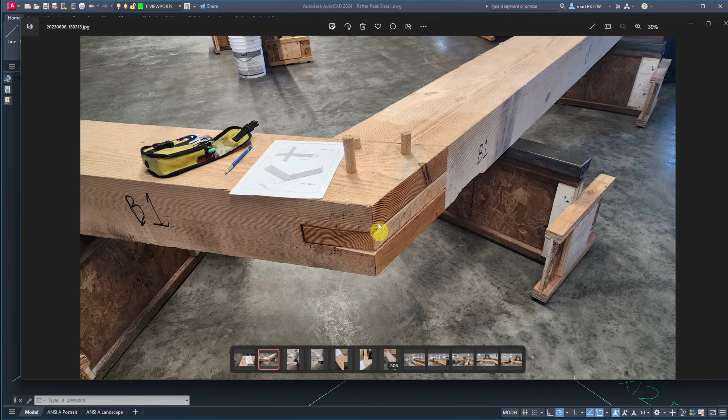So if I match properties there. And then these are in there, but I didn't get exact measurements on their locations. So what I really need to do is take a look at my picture. I'll slide it off to the side. But you can see I've got 2 down low.

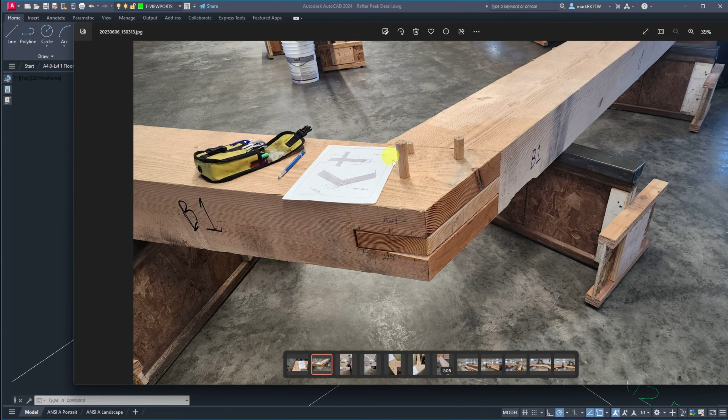He gave me some dimensions: this one is 2 inches in, this one was 1 inch in, and this one I'm going to just align it straight through this portion and put it in that location.

So to do that first one, I can grab this guy, and let's go ahead and locate it from there to here. And then I can move this guy from there to the mid. From there, I want to grab the mid.

Now I don't trust that, because I don't know if it grabbed the midpoint of itself. So just to be safe, let's type mid and drop it on the mid. Now I know it's there. So that one's in good shape.

Or actually, I'm going to leave it in case I need the line type, and I can match properties. So one of them was offset 1, and then it was offset 2, so I'll just offset it twice.

And then I've got to take a look at what we've got, and we're in by probably 2 inches from this guy. So offset 2, and that gives me an intersection here. So I'm going to copy that from there to that intersection.

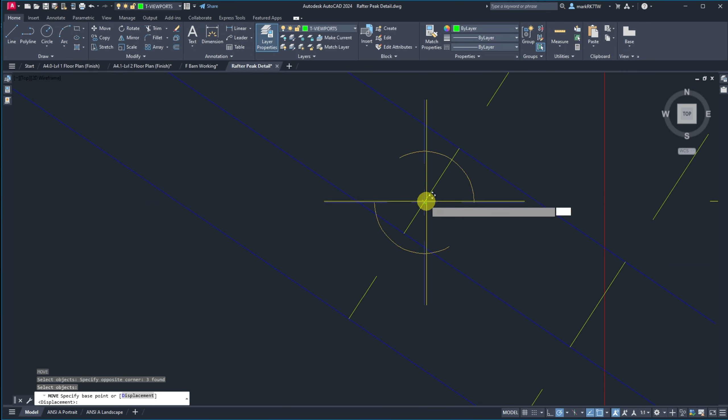Oops, I missed. So now I've got to move it there, there, to there. And then I can get rid of this. And I can get rid of this. So I've got one more.

And that one is about 3 inches in from here. So I'm going to copy that from that point to that intersection. And I've got all of my pieces in here, and I don't need that.

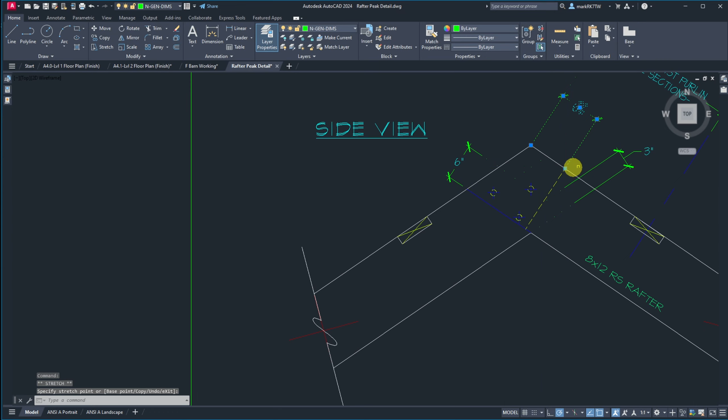So what I want to do now is dimension this out and make it make sense. And these look like they're angled. So I think if I put this here, it should give me a good angular dimension.

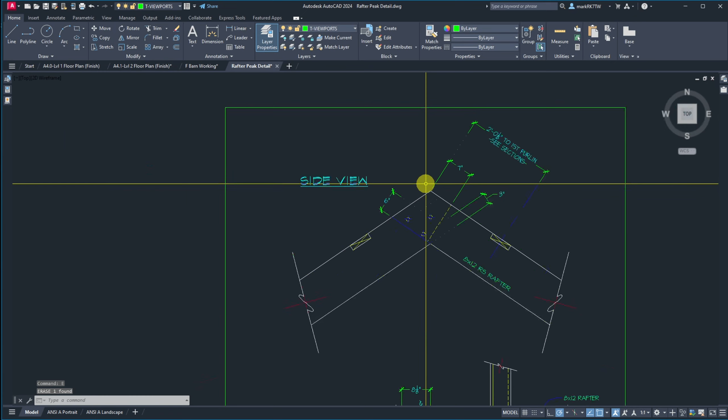Looks like about 6. So if I were to take this and move it, because I can see his marks on the top of the wood, I'm going to offset 6. And then we're going to move this guy right to there. Yep, right on it. Now we got 6. That's a nice number, and more realistic to probably what he did.

So if I look at this, yeah, it's 1 inch. If you watched how I offset that, I offset it off this angle. So this may not have been exactly 1 inch when you measure it in that direction.

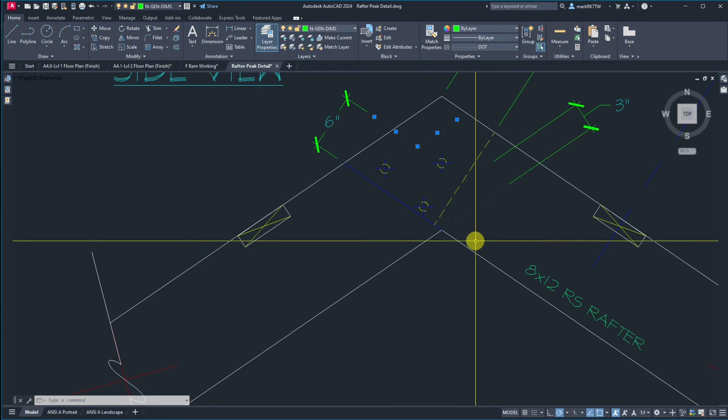So now I need to take and put enough lines in here where I can dimension where these guys are located. And the 1 inch in...

You know what, these are off by a bit. Offset 1.5, because... and then this is 1.

And the reason I'm saying this is because it was to the center, and it's actually the edge. It's 1 inch to the edge. So if I move it 1.5 and they're 1 inch diameter, then it'll be in the right location.

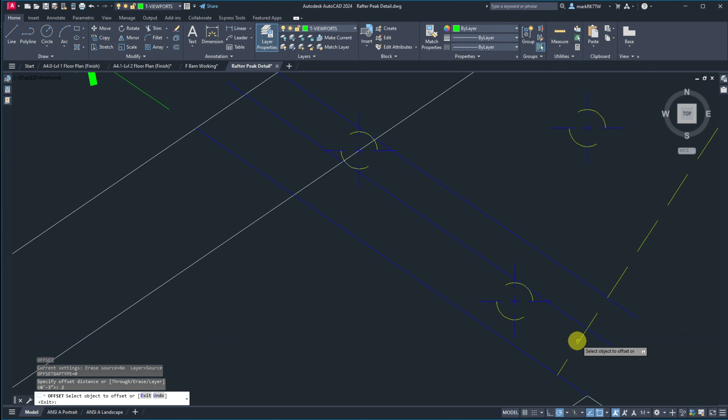So if I looked at this again, perpendicular there, that was about 2 inch. So offset 2. There's my new intersection.

So let's move this guy, get it properly located. And we don't need... well, don't need that one.

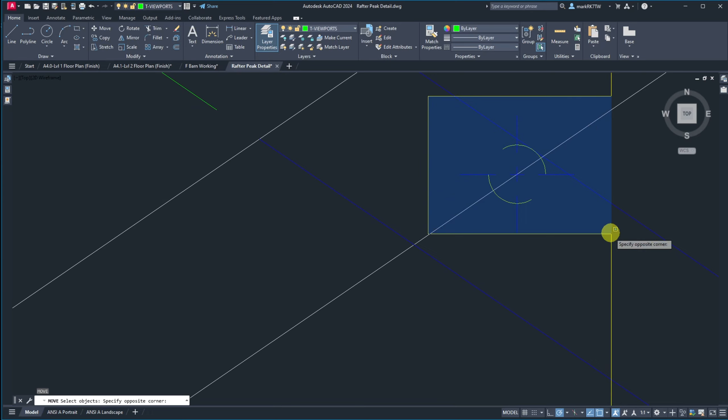Now this one, just move it up to where it's also properly located. There we go. Now it's just a dimension issue.

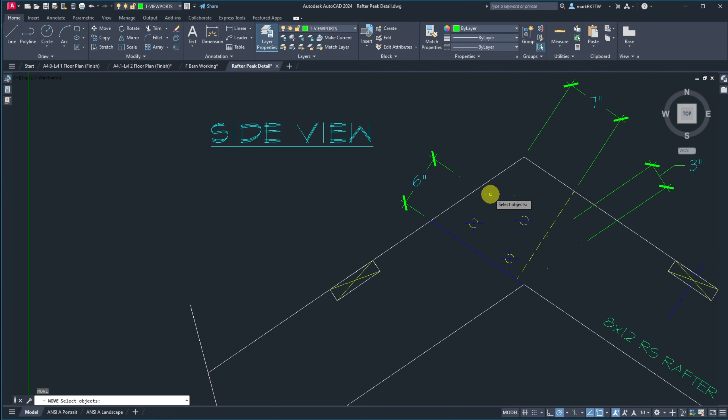And so how do I want to dimension it? Let's see what happens if I take this guy, move it. I'm going to move this line from there to there. Then I'm going to trim it to here.

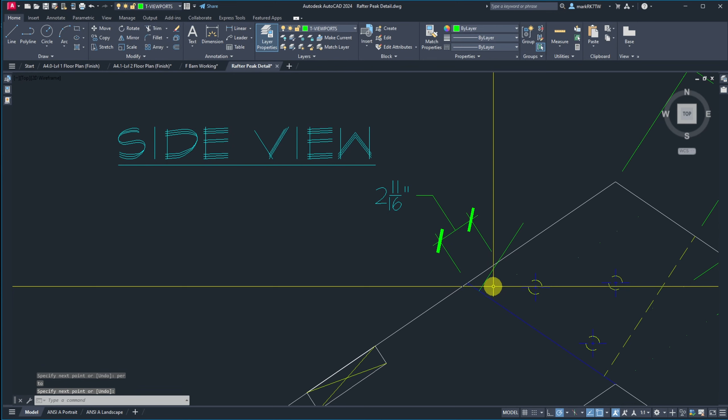You can see it's not being very friendly here, and that's because this isn't sticking out to where it's perpendicular. So if I want a proper measurement, I need to take a line, make it perpendicular to here, then move it from here to here. Oops, missed. There, to there. Then extend out this guy.

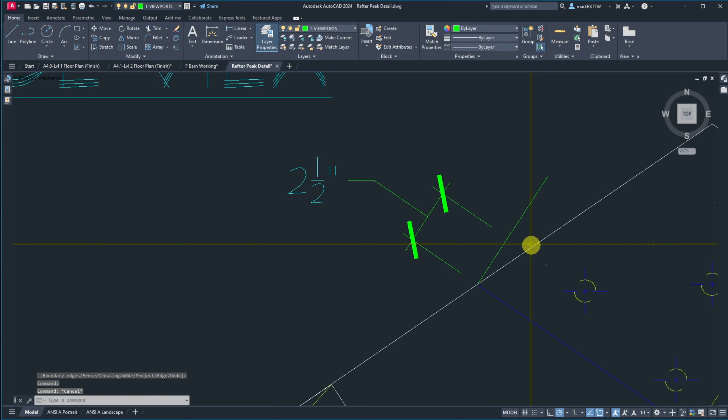Possibly, there we go, it did it. Now, just get rid of that. And that is looking very nice.

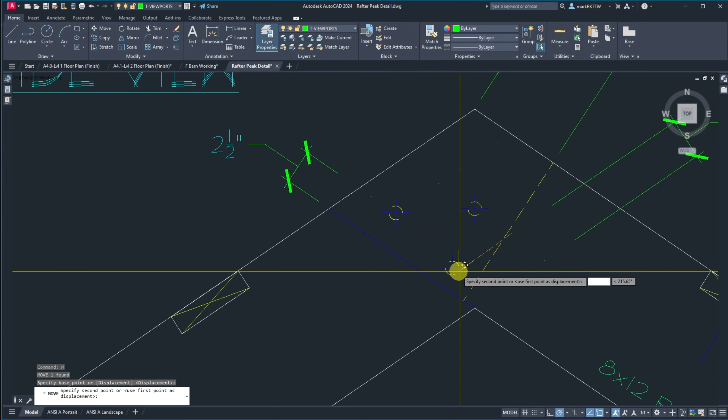So to get the 2.5 inches over on this side, I'm going to dimension it on this side. And let's see, what is this guy? Let's move it from there to there. Let's extend it up to here.

Oh, nope. Extend to there, that. There we go. Now I'm going to do the same with this. Extend to here, that one. And that way I can take this and move it to 2 locations.

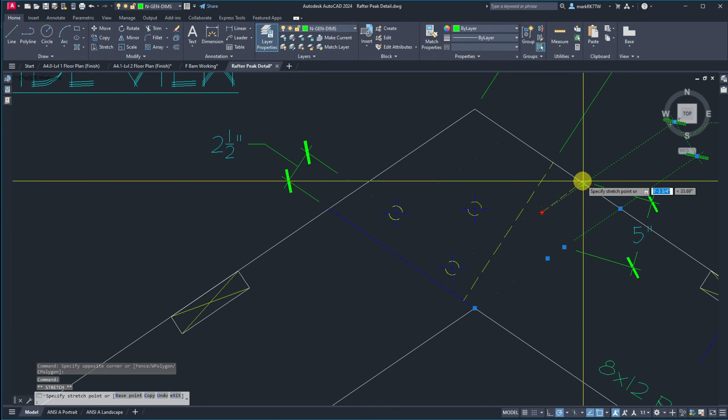That, oh, it's not perpendicular. See, this is perpendicular to this. So it's the same issue as we had here. So I can either extend it out beyond or I can pull it in.

And I think beyond will make it clearer. So I'm going to go beyond. So I need a line.

Best way to do that. So I want it to be perpendicular to these 2 lines. Oh, I see. I need a line anywhere from here to perpendicular to this line.

Now I can move that from here to that spot, extend out to here, this guy, and then grab that and put it there. And that is probably going to give me a much better result.

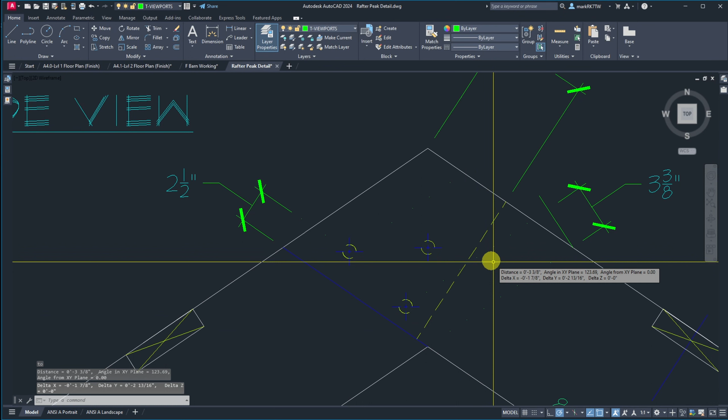So 3 3/8. Now I thought we did a distance of 3, but it's perpendicular to that, it is 3 3/8. Okay. Because we went off of this line. That is what we did. We went off of that line.

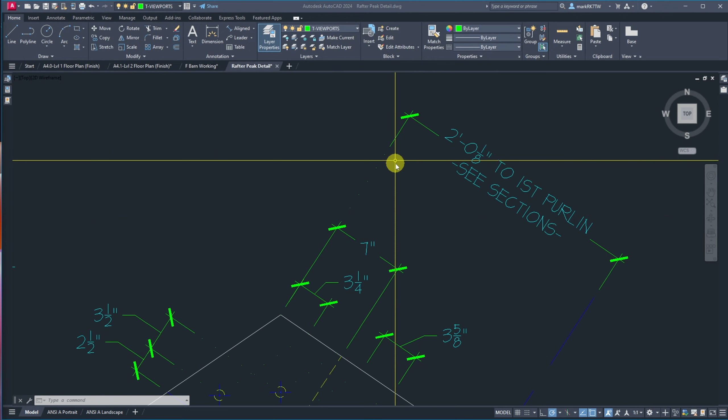So getting this thing done, this is what it looks like. So I've got my dimension strings, got my 3 pegs in, got the line drawn, which you saw happen. Then I just transferred those pegs straight down to give them this location down in here, so we could see what was going on. Everything else was in great shape.

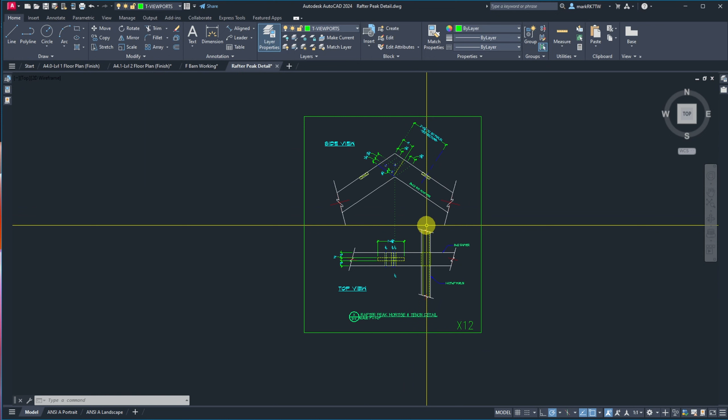So we'll just do a zoom extents, hit save, and that one is done, and it's just on and on through the rest of these details that we've kind of gone through, I believe, in other videos. In fact, I know we have.

And just taking the information that I received from the timber framer, I'm going to translate that into our actual drawings, and then I will have good shop drawings for all of these connections.

And here's a good one, just looking at my papers here, and maybe a good idea might... kind of hard to decipher. I could explain it, some slight taper, that sort of thing. Maybe I'll scan this image in, just kind of explain what he wanted versus what I had drawn.

Then I'll make those changes and just reveal the final product. So I'm going to scan these and I'll be back. So the scan,

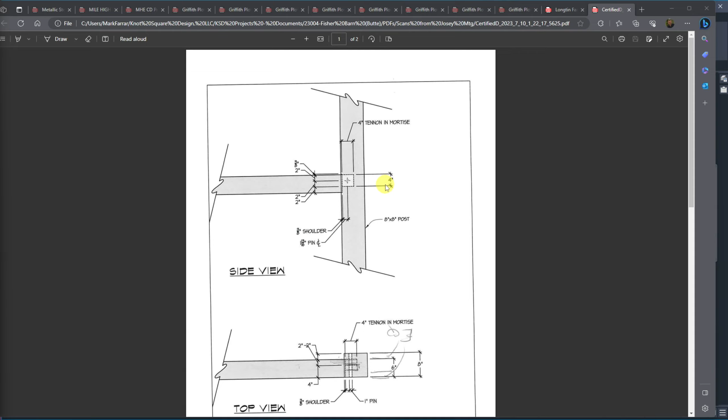here we're just putting in the middle. He just wants to be equal both sides. And he wants it equal on the post. So it may hug one side, it won't be flushed here, which is what I kind of assumed he'd do to create less work for himself, but it's not what was explained to me.

Here, this is slight taper. And so instead of this being straight up, he wants just a slight taper in it. And then this will be a 90-degree angle to this location here.

Down here, doing the 1-inch shoulder, and then just bringing it up, in and out. So it's about plus 4 inches post shoulder for tenon.

And I have voice recording to help me with some stuff, but I believe if I listen to that, what he's talking about is the depth of this will be about 4 inches. And he says that kind of varies a little bit as he starts to do it. So these are like 4 to 4.5 inches for these guys.

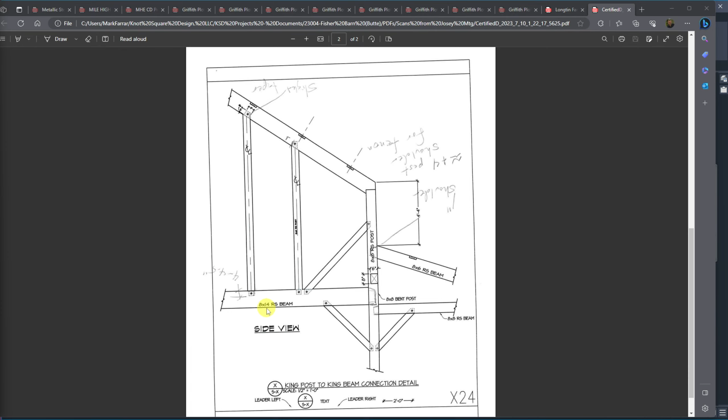And let's zoom in on that. So it looks like I even drew on here that this is fully straightened out to a full width, to one edge, but not both.

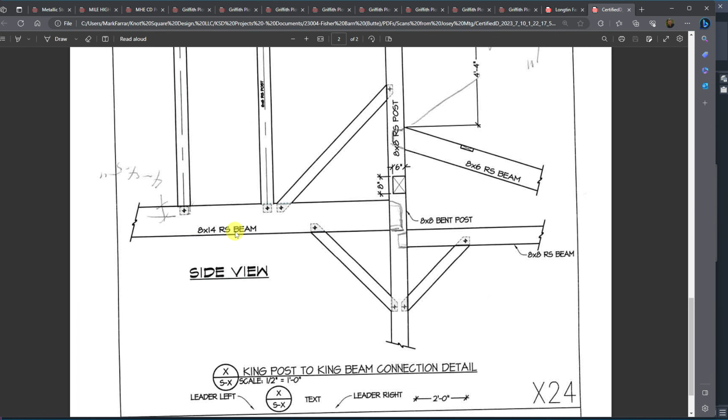So I also have notes on these guys. All these are to be about 3.5 inches deep. So no matter where it's at, they're about 3.5 inches. And I think that's about all the notes I have. Everything else seemed to be pretty straightforward.

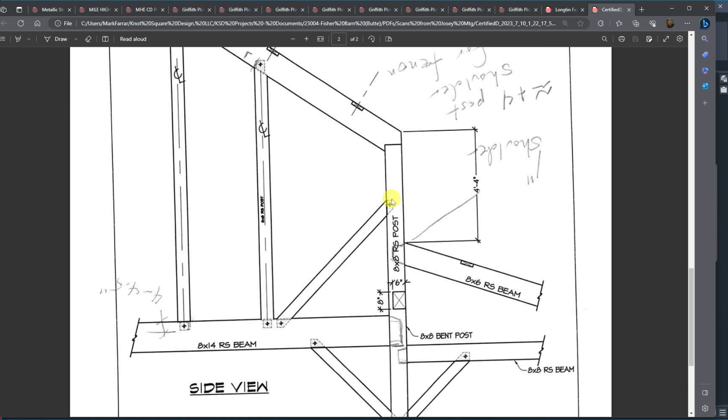Well, there is one for, let's see, that location would be similar. Oh, it's a mid-post location. So it's like this location, except it's where it comes in from both sides. And all he's stating is that, like everything else, make this that 4 to 4.5 inches, but he wants these tops to taper down and the bottom to be flush.

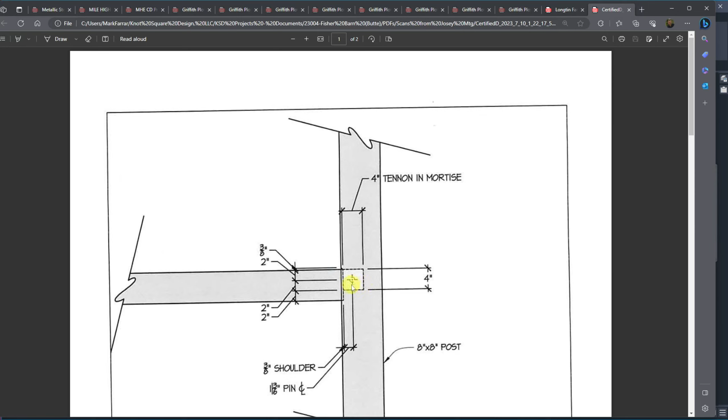So I'll just come out, come up 4.5 inches, and then taper it up, kind of where it hits, from my understanding. And if while I'm listening to his voice recording that ends up different, I'll point that out. That would be the same from both sides. Since their depth is only about 3.5 inches, on an 8x8 post we're not going to intersect from one side to the other - there will be solid timber all the way through the middle portion. That makes me feel better about the way this is being done, to have some good, even if small, solid lumber all the way through.

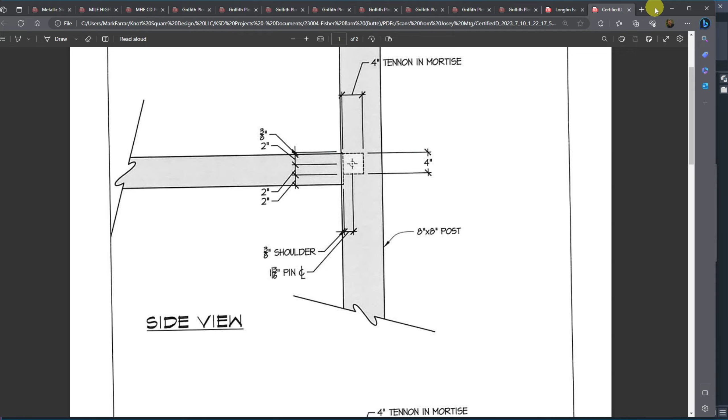So let's go to it. I'm gonna go back to my details, pull these over to the side where I can see them. Actually, I don't need them - I've got paper copies. I'm just gonna go through, open up the other details, make those changes, and come back. There's no sense in watching me draft.

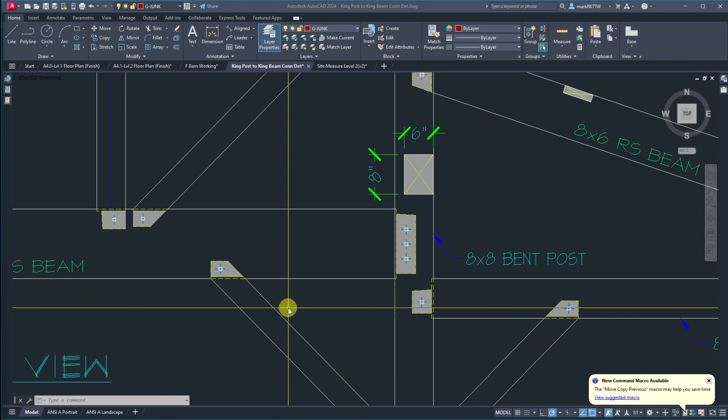All right, so now we're looking at the finished product on the next series of details. It's got the tapers in here, small tapers on the top, 1-inch shoulders. Put in some rough notes, 90-degree angle symbols, that sort of stuff to kind of describe how this goes.

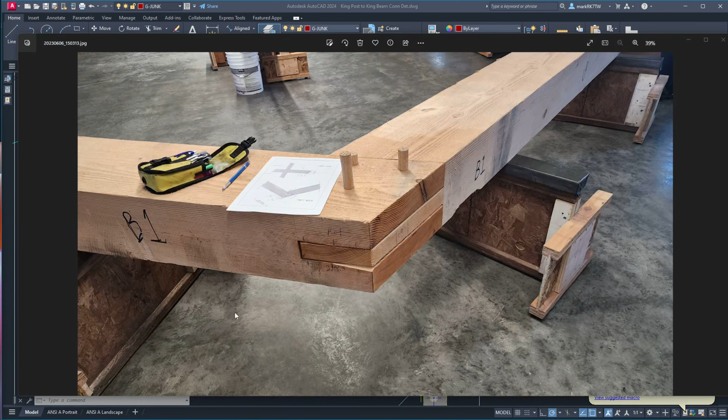Actually, it looks like I'm missing that one, so I need to finish that one up. I guess I'm not done. So this one here is that ridge joint, but when I started looking at that next one I've got to do...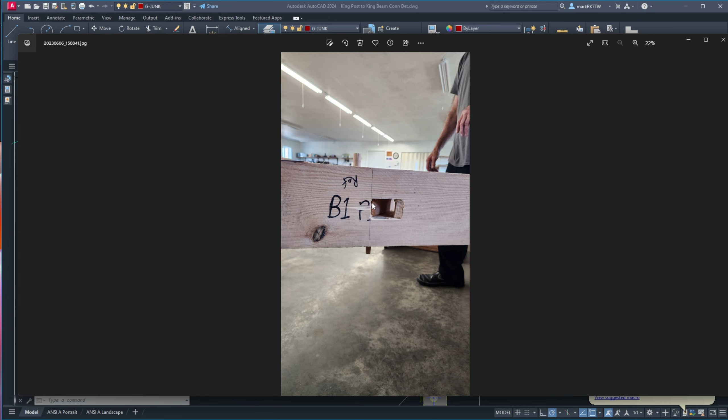How he did it is he brought the tenon all the way up into the mid portion of this, and then if I look towards the end, he kept it down from the top - it's kind of hard to see from this angle, but he kept it down. It's about 1 inch right in through here. I'll turn my highlighter off again. About 1 inch right in through here.

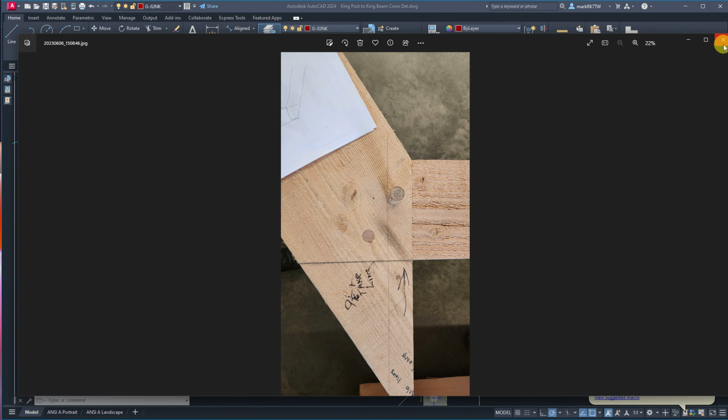I don't know if the highlighter helps in this case. You can see how this is straight up, and this will have the inch in, and then a taper, and then over to where you finish that out. So that's what I'm going to draw this in at. Hopefully that'll make sense once I get this detail done.

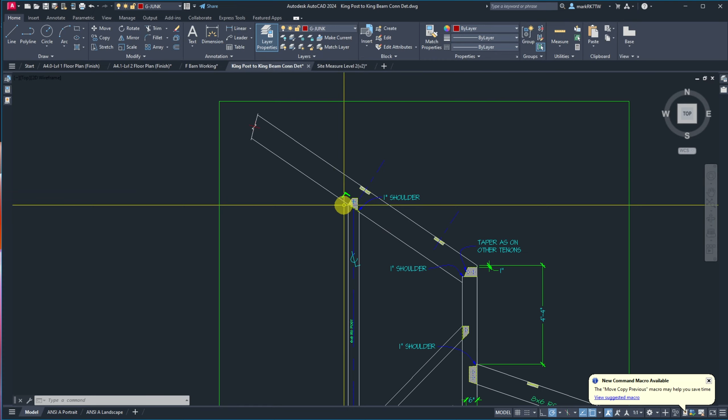So the one part of this that I don't know, now that I've got it done, is taper as on other tenons - but I don't know how much taper this has. If you look around, this one he wanted at 90 to this angle here. But a lot of these other tapers, well not that one, but like here, they're pretty shallow. So I just don't know what this one is.

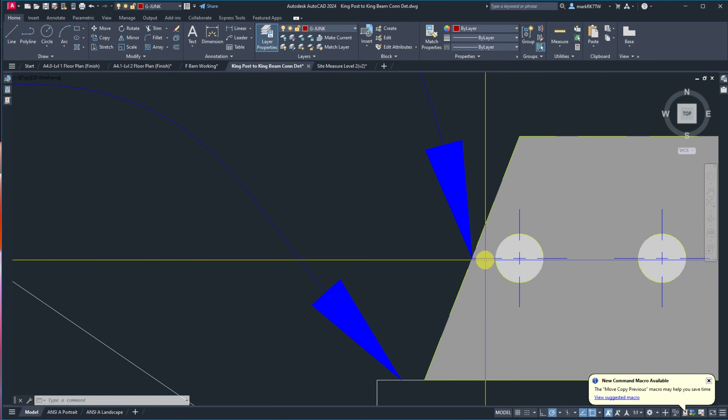Aside from this getting too close so we don't have any meat left, I don't know that it's critical on the amount of taper, but it would be nice to have some more meat left. So I'm gonna bring this up. Right now my distance from here to here in the X is about 2 inches, so I'll bring it back to 1. I think that'll take it quite a bit.

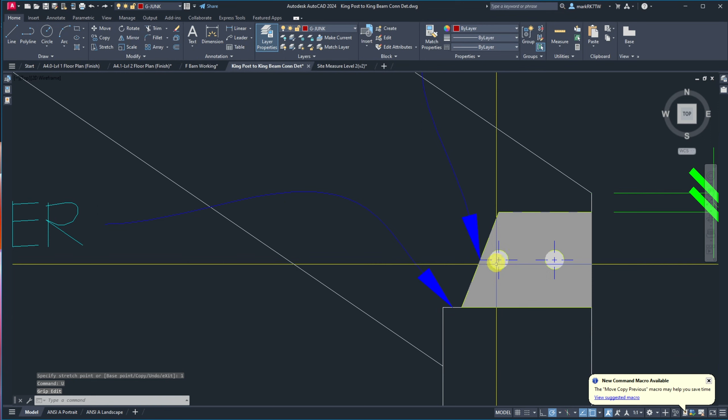So I can try and drag this over. And this doesn't work yet - I was hoping that this would work in AutoCAD. But see what it does? You can't drag it in a direction. So you have to do a couple steps to get it to do what you want it to do.

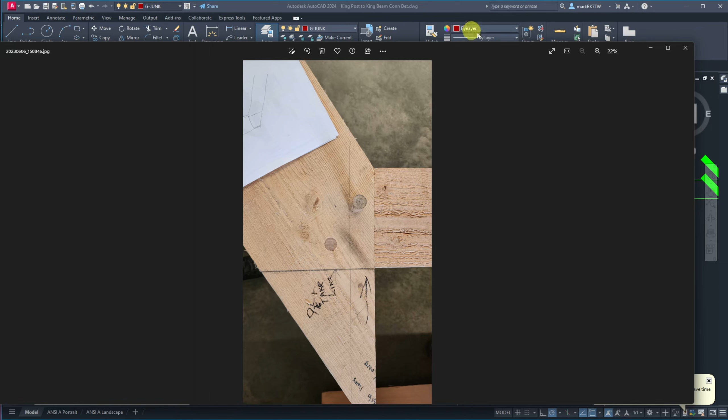So I draw a line from here up, say, and then just move that over the 1 inch, grab my pieces, and bring them over. Oh, I moved it, I didn't stretch it - undo. Because it does come right to the edge. When he cuts this piece off, you're going to see that sticking through there. It's pretty evident, from other views like right here, you'll see that when he cuts that off, it's going to be right there.

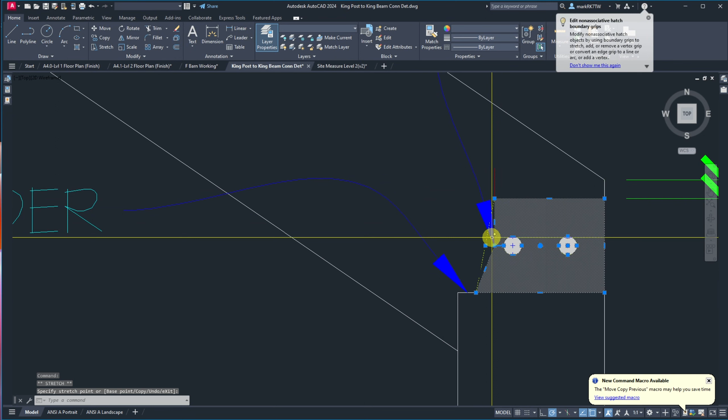So now that I have this here, I can just bring it over. And of course I've got some wackiness going on with my hatch, but pretty easy to fix. You can do some stretching - sometimes it doesn't stretch nicely, but this one did. So that is how this one's looking so far.